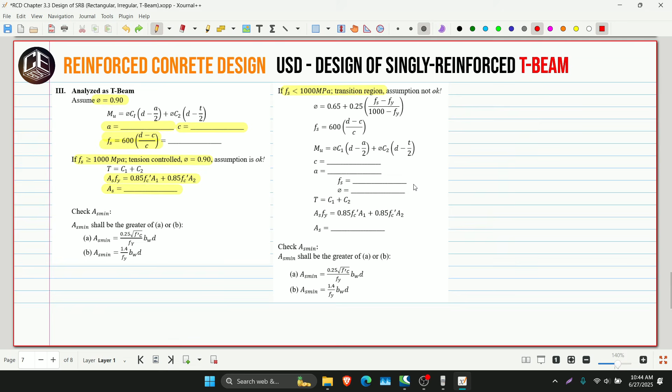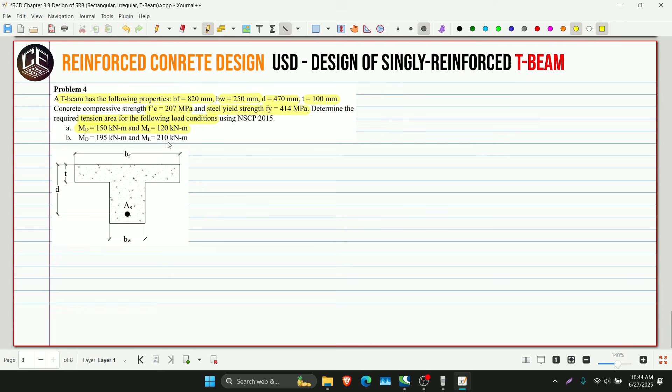The T-beam has the following properties. Ang BF natin ay 820, ang BW natin ay 250, ang D is 470, and the thickness is 100. The concrete compressive strength is equivalent to 20.7, and the steel yield strength is 414 megapascal. Now, determine the required tension area for the following load condition. Letter A, 150 kN meter and 120 kN meter. That is MD and ML respectively. So letter B naman, 195 and 210 kN meter.

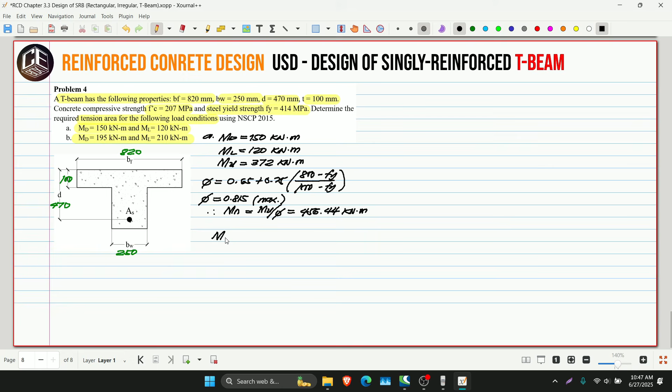So, kunin muna natin pala yung C max para malaman natin kung T-beam ba siya or hindi. So, ang ating C max is 3 over 7 multiplied by d. At ang ating a max naman is equivalent to beta 1 multiplied by C max. So, 470 multiplied by 3 over 7. So, 201.43 millimeters. So, 20.7 ang ating f'c. So, less than 28. So, i-multiply natin ito ng beta 1 na 0.85. So, 171.21 millimeters. So, yung ating compression block ay lumagpas sa 100 millimeters.

So, papasok yung ating a dito sa web member. So, magkakaroon tayo ng dalawang area. So, ito yung ating gawing area 1. Ito naman yung ating area 2. Ayan. So, 1 and then 2. So, therefore, ang ating Mn max is equivalent to C1 multiplied by d minus a over 2 then plus C2 multiplied by d minus t over 2.

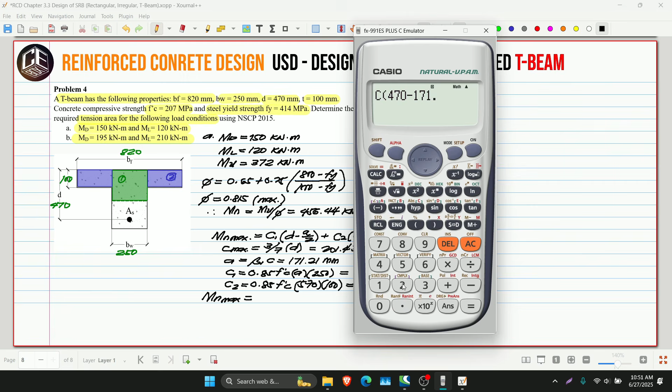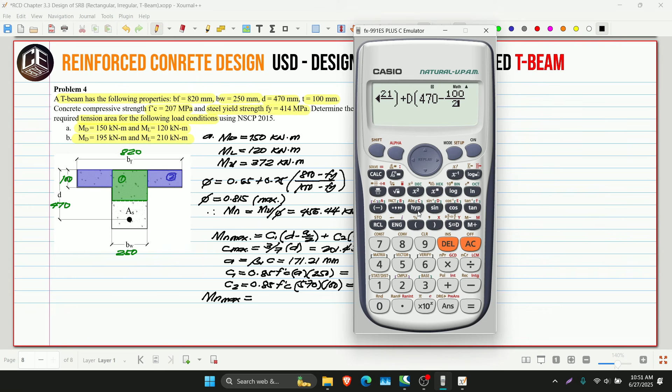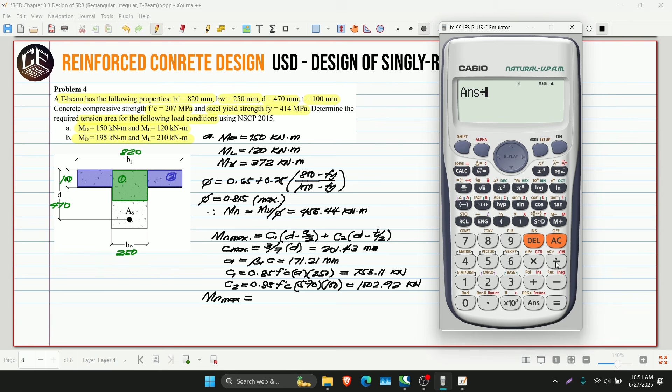C1, so siguro gawin C na lang, multiplied by d. So, this is 470 minus a, 171.21 over 2. Then plus D multiplied by d, 470 minus t, 100 over 2. Yung C natin is 753.11. Ang D naman natin ay 1002.92. Tapos, i-divide natin ng 1,000 para maging kilonewton meter. So, 710.72 kilonewton meter. So, since ang ating Mn max is greater than sa ating Mn, therefore, under tayo ng singly reinforced beam.

So, ito yung ating step 1. So, step 2 natin. Anong sabi doon? Kailangan natin makuha yung capacity ng ating flange member. So, kunin natin yung Mnf. So, pag kukunin natin yung Mnf, yung ating a is equivalent to t. So, ito yun, no? Ayan. So, ngayon, ang Mnf natin is equivalent to what? Okay, C multiplied by d minus t over 2.

So, yung ating C is equivalent to 0.85 f'c multiplied by 820 multiplied by thickness na 100. Ayan. So, calc natin, ang A natin is 820, tapos ang B natin ay 100. So, 1442.79 kilonewton. So, ilan kaya ang ating Mnf? So, 1442.79 times d minus 100 divided by 2. Then, divided by 1,000. So, this is 605.97 kilonewton meter.